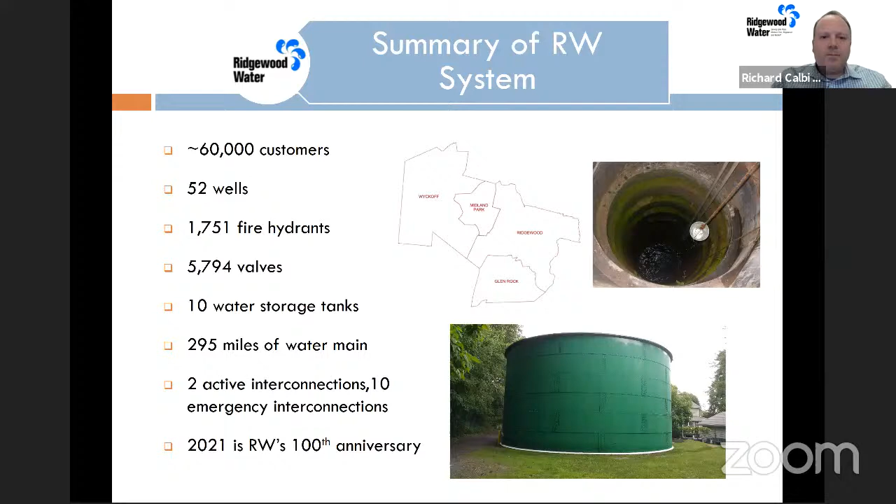Next slide please. A little background on the sources of our water. Ridgewood Water has 52 wells that account for 90% of the water treated and distributed into the system. These wells are drilled into the Brunswick Aquifer. There's a fun fact relating to Ridgewood Water wells: some are as deep as the Empire State Building is tall. We have one well over 1,000 feet, but most are in the hundreds.

The other 10% of water we provide is purchased via the interconnections. This is used primarily to meet peak summer demands and is purchased from the Borough of Hawthorne, which is groundwater, and Suez Water, which is a combination of both groundwater and surface water. This is important because Ridgewood Water's daily demand ranges from a low of 5 million gallons a day to upwards of 17 million gallons a day during summer peak months.

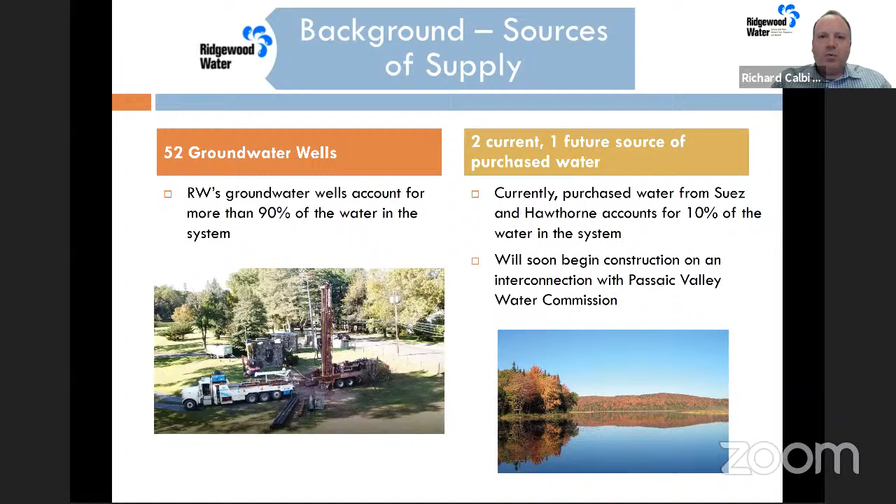Most of this peak usage is associated with residential irrigation. To help manage this peak and lessen the concentration of PFAS in Ridgewood Water, we will be purchasing from a different source in the future, as early as 2022, from Passaic Valley Water Commission, which is also a surface water source. So to start things off, I'm going to turn it over to Dan Timmeny.

Dan is our business manager for the utility. He's responsible for managing department affairs, specifically the customer service, billing, and metering divisions. Dan is going to start and talk about customer service.

Thank you, Rich, and good evening everyone. Thank you for joining. Ridgewood Water has been planning an overhaul of customer service, leading up to the rollout of 3 new user-friendly technology tools that we will be pushing out in the coming weeks. The first is a new Ridgewood Water website. The second, we are transitioning from our current payment processing vendor, MCC, to Invoice Cloud. And the third is a software-as-a-service called WaterSmart, which we think will completely revolutionize our customer service operation.

So to speak about the first item, the new Ridgewood Water website: when we set out to design the website, we wanted it to be user-friendly, organized, and aesthetically pleasing.

We wanted our customers to easily find direct links to most used items and those that are most frequently accessed. We also plan to feature interactive tools such as address lookup during annual hydrant flushing and service line material lookup for your information. We will be constantly updating a news item ticker, and the website will be mobile friendly and directly linked to our social media platforms.

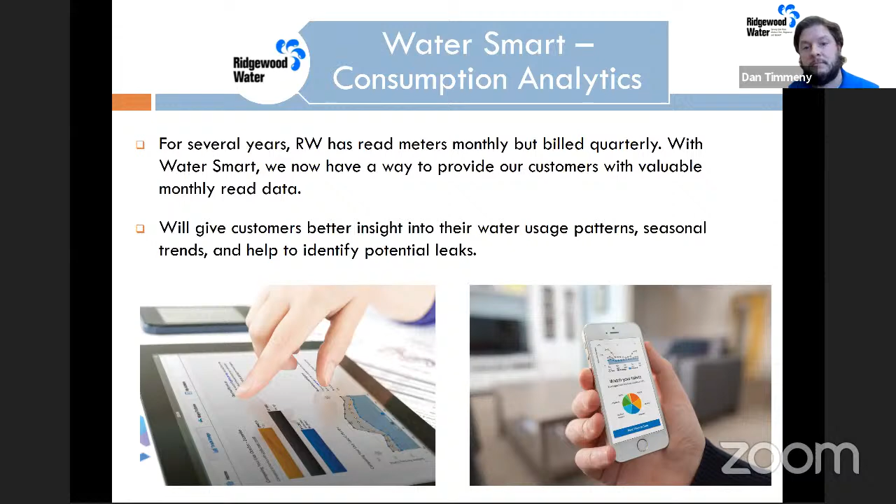So that two-way communication regarding potential leaks can really help to save money for our customers and reduce water waste. On the utility side, we'll be reaching out to some accounts proactively each month to ask customers to check for leaks on the property because of increases that we've observed in water usage.

Based on the amount of water used, a potential leak might be associated with a higher likelihood of a running toilet rather than, say, an irrigation leak. Customers can then respond to our communication about a potential leak directly based on whether or not a leak was found, and we can work together to determine the next steps.

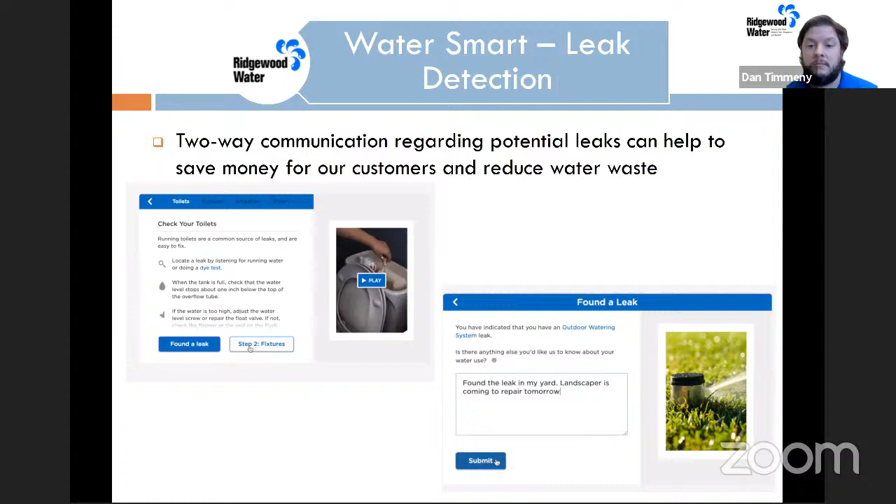In terms of registration, you will all be receiving in the coming weeks a welcome letter from WaterSmart from Ridgewood Water detailing the registration process. On the back end, everyone has an account already created—it's simply logging in and accessing that information. So all you need is your account number and zip code, followed by a simple registration using your email and password. Once that's up and running, this tool, which is free for all customers, will give you information we have internally, plus many more self-service tools. We're very excited to roll this out to you in the coming weeks.

Thank you, Dan. I think it's pretty clear that WaterSmart's going to help Ridgewood Water take the next step towards conservation and sustainability, and that's part of our overall goal in treatment and the whole operation of the system. So speaking of treatment, we have Ryan Furrey up next.

Ryan is a Ridgewood Water chemist. He's responsible for the Ridgewood Water lab and all testing and associated compliance for the New Jersey Department of Environmental Protection. So Ryan, why don't you take it away?

Hi everyone, my name is Ryan Furrey. I'll be talking about our treatment division today. Treatment division is pretty self-explanatory—we own, operate, and treat all the water that we're pumping from our underground aquifers and provide to you guys in our distribution system.

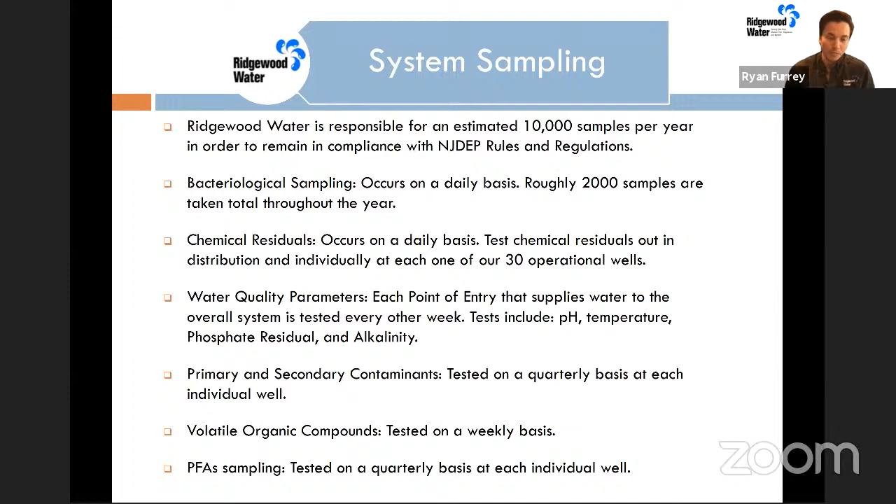Moving on to the next slide—Ridgewood Water's pilot studies. We've taken a very proactive approach with our treatment strategies through the use of pilot plant instrumentation. Basically, a pilot plant is a small-scale water treatment operation in a controlled and isolated setting.

What we do is take the newest technology, chemicals, theories, and ideas, and perform experimentation in a closed loop, making sure the effluent isn't discharged into the distribution system. We monitor, analyze, and compile all the data over a long period of time, and look at how these new technologies and chemicals are working to see if we can implement them into our own system.

It's honestly beneficial twofold—not only for us, because it optimizes our system and ensures we're doing the right thing, but it also can help with cost. So if there's a new technology or chemical out there that does the same thing but at a better cost efficiency, obviously we're going to use it, because it'll help not only us but you guys as well—it'll be easier for you to pay for the water.

We've just recently finished up a lead and copper optimization study for our pilot studies. We also did a mixing study with Passaic Valley Water, which is actually part of our new interconnection, and it's going to allow us to increase our demand and maintain water into our system. We're also in collaboration with the EPA on one of our PFAS studies, so it's an exciting thing, and we're going to continue doing this kind of work for the foreseeable future.

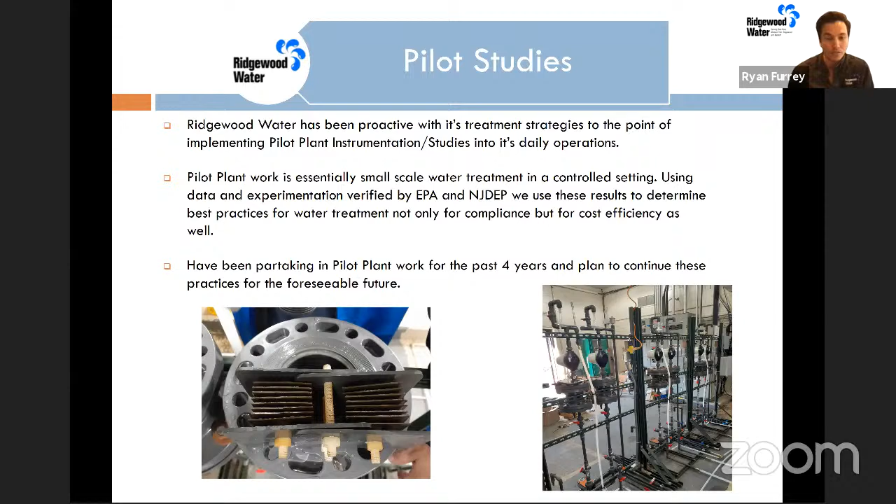So how does lead actually enter the drinking water supply? This is a great question, everybody should know and be informed about this.

This is not naturally occurring. Basically what happens is as water interacts with pipes, lead solder, and lead service lines, the friction when it's moving over a pipe is going to take that lead through what they call leaching, and it absorbs into the water supply. That's how lead contamination occurs. In layman's terms, it's like when you rub your hands together and get friction, you get particulates coming out in your hands. So that constant rubbing over lead solder and lead service lines is what causes the lead to leach into the water supply, and that's what people could potentially be ingesting.

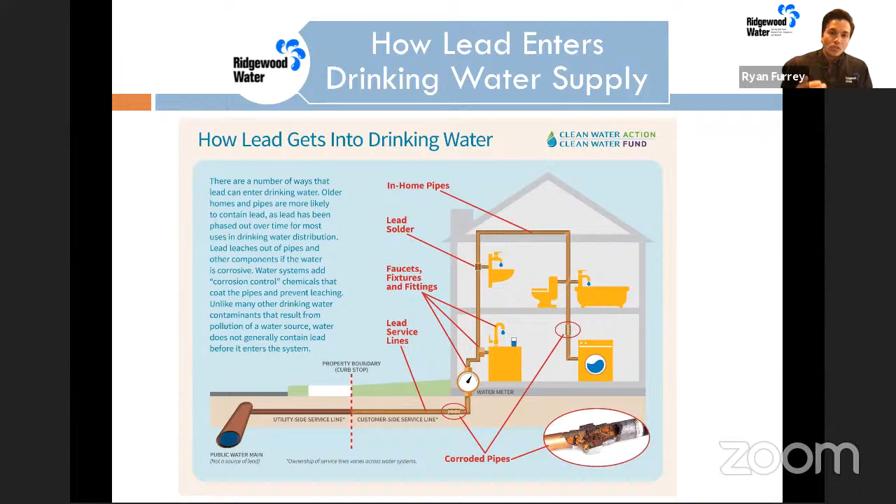If we move on to the next slide. Basically how we take care of this is with an addition of polyorthophosphate. It's a food grade additive, to be honest with you. It's something that is used constantly and people ingest all the time.

Basically what happens is it creates a small biofilm. If you picture a pipe and water, as water's running over a pipe, it's interacting with that pipe and constantly rubbing, getting more and more lead into it. But when we add this new chemical into the pipe walls, it coats the pipe walls and creates a small barrier. So now picture a pipe with a small barrier and water flowing over that barrier - you have a nice little gap. So now you don't have that interaction between pipe and water, and that's how it's protecting you from lead and copper contamination. That's basically what's happening.

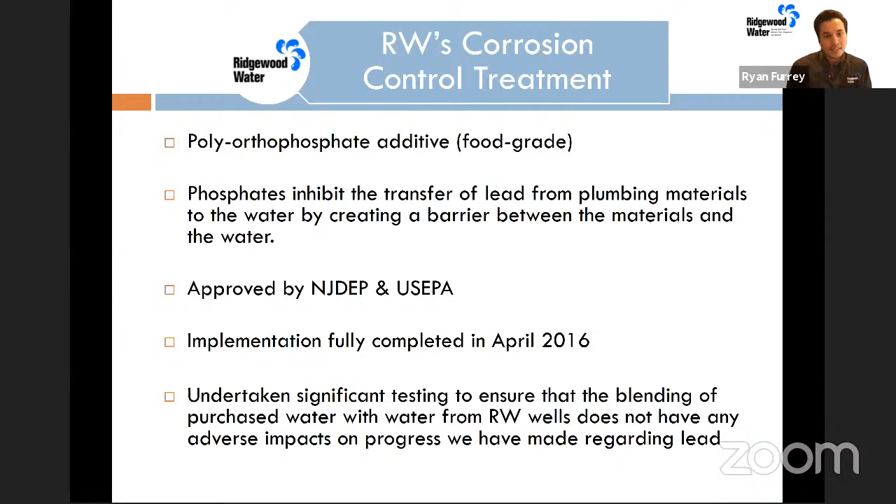So we implemented this new corrosion control treatment in April of 2016. Looking at our next slide, you can see the results of this implementation.

Anybody can access this small table right here - it's an NJDEP approved website. If you type in NJ Drinking Water Watch and click on the first tab, you can find all this information online, but this is just a snapshot so you can see in real time what I'm talking about. From 2016 on to 2021, you can obviously see that lead and copper has significantly reduced over time since we added this new corrosion control inhibition.

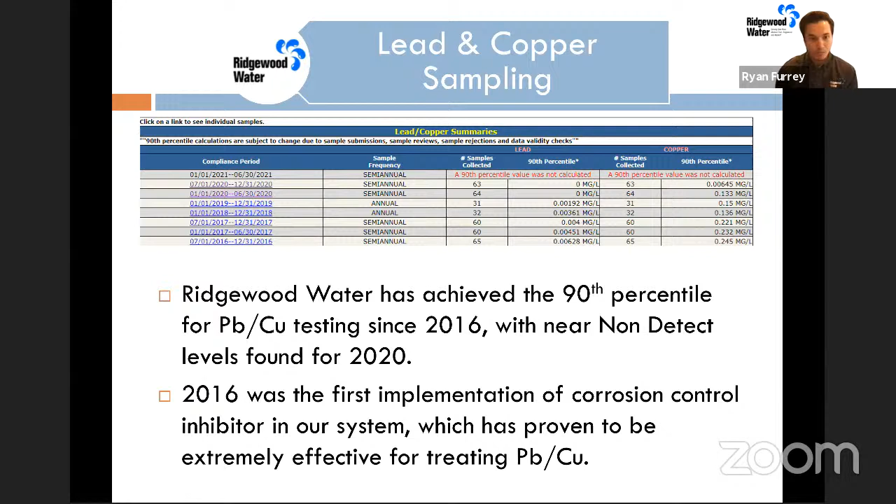The way that we collect samples for this is not biased - we're not taking it from random spots that we can control. We have to coordinate with the DEP and take samples from sites that they have determined, out in the distribution system. People volunteer for us and take water from their own tap, so it's real-time data essentially - what's actually coming out of consumers' taps. It could be your neighbor, it could be someone out in the distribution system. That's how we're getting all this data for the DEP, and as you can see, it's been working very well.

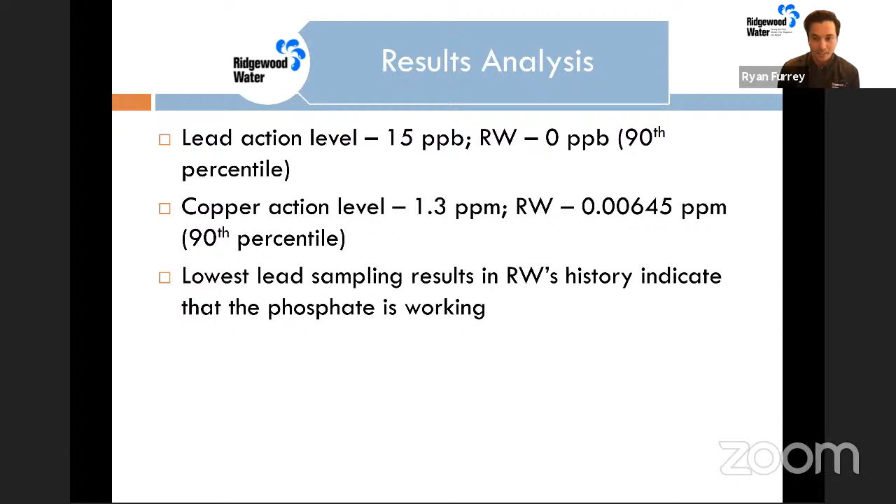Again, for the results: the lead action level is 15 parts per billion. Last year we had 0 ppb, so that's fantastic. The copper action level is 1.3 parts per million, and we've gotten it down to 0.00645 parts per million. These have actually been our lowest recorded sample results in the history of Ridgewood. So obviously the way we're treating for lead and copper has been very effective, and we're going to continue doing that unless we find a different technology from our pilot studies, and we'll try to implement that. That's all I got.

Thank you, Ryan. I'm glad you took time to highlight lead and copper, because no matter what the newest type of contaminant may be, we always get questions about lead contamination in the water. So it's important that we shared that today.

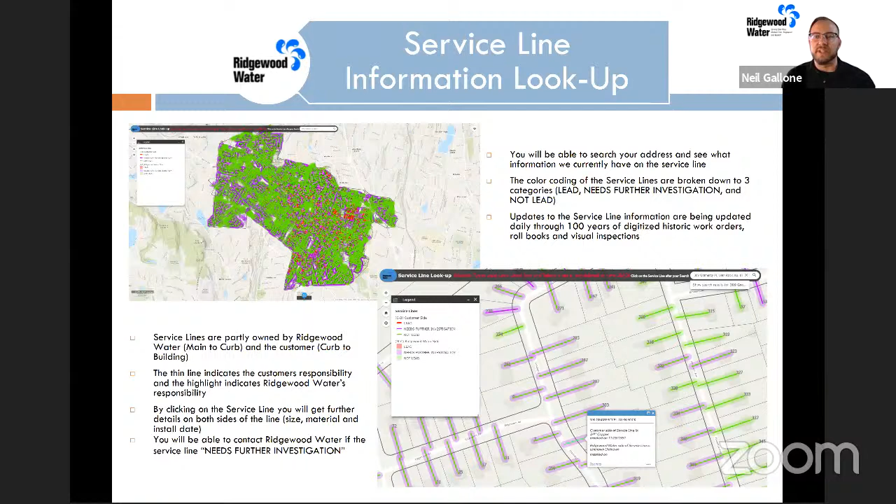Once you know what your line is made of, or if you see that it needs further investigation, an additional resource we are going to provide, and currently do provide, is a discounted water test kit. You'll be able to contact customer service and set up a day for an employee to drop this kit off at your home, which will also include instructions.

We do our hydrant flushing in the fall due to supply constraints in the spring and summer, and temperatures being too low in the winter. When we're doing our flushing, we use about 1.5 million gallons, which is why we can't do this during the summer. We also attempt to perform these flushings at night to limit the impact on water service and quality.

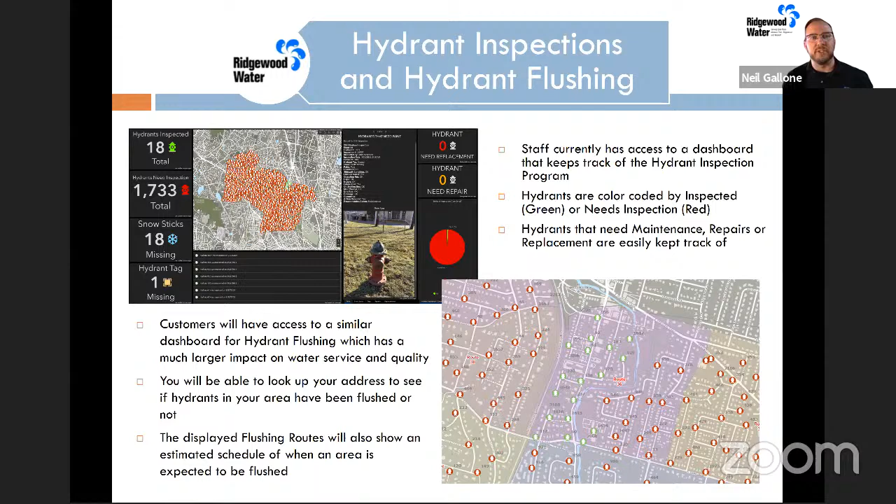With this flushing dashboard, you'll also be able to see when hydrants are being flushed live. When the men are out in the field flushing a hydrant and they finish, they complete it in the field, which is connected to this dashboard, and you'll see the hydrant go from red to green. You'll also have an estimated schedule when you zoom into your property and search for your home, displaying when we believe we will be in your territory to perform this flushing, to help alleviate any issues you might have with dirty water.

The last one we're hoping to have out very soon should be kind of familiar to everybody—if you're ever wondering, does PSE&G or Orange and Rockland know I don't have any electric now that the wind has been blowing a little too fast?

This one will, for water outages, show both emergency and planned outages. It will display the exact location of an event and highlight the customers that were affected. Some examples shown on a map like this would be water main breaks, main replacements, valve installs, and boil water notices.

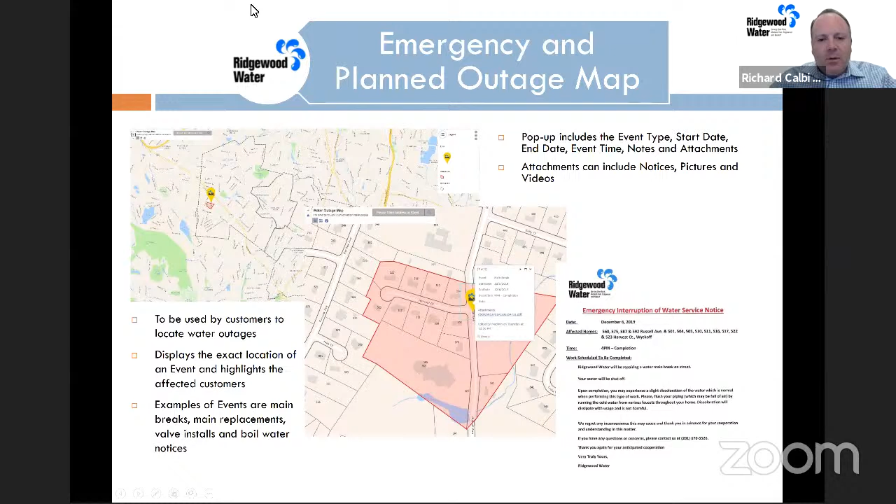Thank you, Neil. It's important to mention, mapping has been something utilities have used for, I don't know, 10, 15 years or more, and it's helped our planning and operations greatly. It's so great to see now that we're going to be able to share that with the public and give users the ability to see everything we're doing live. It'll help the consumer better plan themselves for improvements and things they're doing around their home.

Yeah, I've been doing this 21 years here now. So this is a nice change to be able to show some of the work, not just to all my fellow employees, but hopefully to all the customers out here as well.

It's very exciting stuff. All right, so next we're going to turn it over to Bill Bierwas. Bill is the Assistant Superintendent for Ridgewood Water. He heads up compliance, filling in for our licensed operator. He runs the distribution division and also the treatment division at times. So Bill's going to give us an overview of some of the work we're doing on the distribution side of things. All right, thanks, Rich.

Thank you for the intro, and thanks everyone for joining tonight. It's such a beautiful night. I'll try and make it as brief as possible. What I wanted to start with tonight was talking a little bit about the distribution division.

The distribution division of Ridgewood Water is not commonly highlighted at our open houses and community forums, although their work is just as vital to the safe, clean drinking water provided to your home. These crews are the ones in the trenches, digging and making repairs to our distribution network despite heat, rain, and even snow. So what do these crews do on a daily basis?

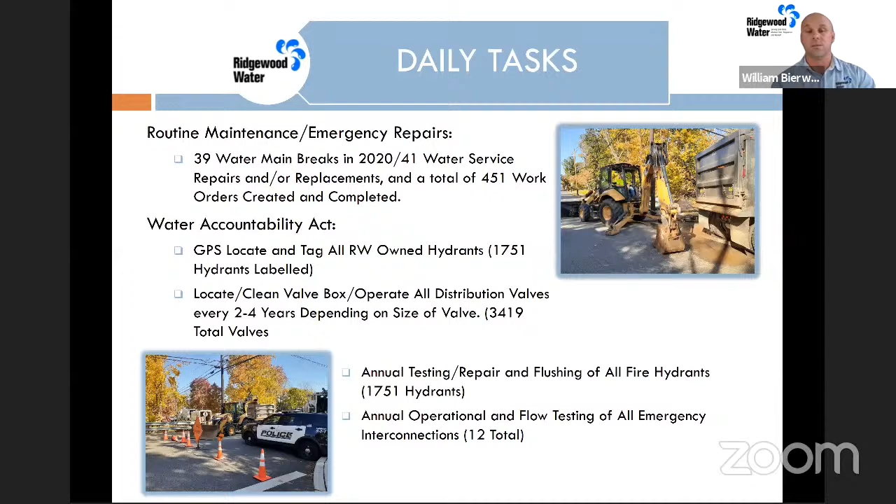In 2020, Ridgewood Water initiated in-house efforts to replace and construct new water mains within the system. 3 quotes were solicited for the replacement, and prices ranged from $147,500 to almost $300,000. Distribution staff completed the entire project for $89,500, including base pave, for a savings of $58,000.

Due to the success of the project, crews continued to replace over 2,000 linear feet of water main in 2021. Ridgewood Water also contracted OnCue to replace an additional 4,100 feet of pipe. The distribution goal for 2021 is an additional 2,000 feet of water main, for a grand total of just under 2 miles of pipe replaced in just less than 2 years.

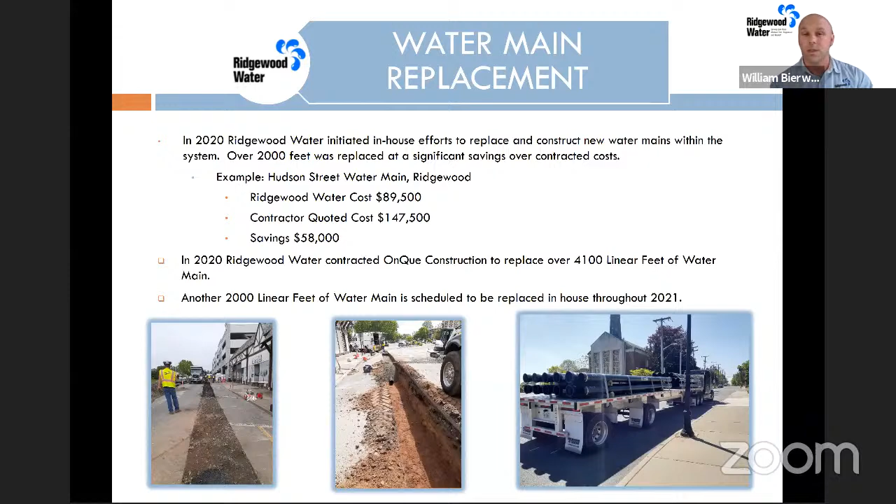So on the bottom here, you're going to see a valve replacement that we performed. This was towards the end of 2020. Ridgewood Water staff identified 2 damaged valves during the routine valve inspection program that Neil mentioned earlier. These valves crossed Route 208, and replacement required coordination with the NJDOT, Wyckoff Police Department, Ridgewood Water Treatment Division, and various local traffic details. Each 16-inch valve, shown on the bottom left there, next to one of our guys, weighed over 1,250 pounds without fittings, and to date is the largest in-house valve replacement performed by Ridgewood Water.

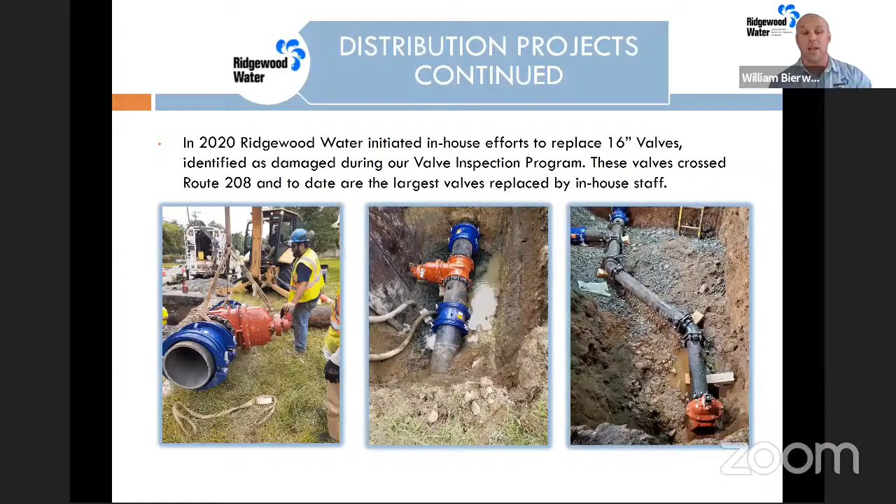Next, I want to get into the PFAS master plan. So what is PFAS? If you take a look at our notice, you probably know a little bit about it, but I want to go a little more in depth. PFAS is per and polyfluoroalkyl substances, of which there are hundreds of compounds, including PFOA, PFOS, and PFNA. These compounds are found in firefighting foam, nonstick coatings, water repellent coatings, and even food packaging.

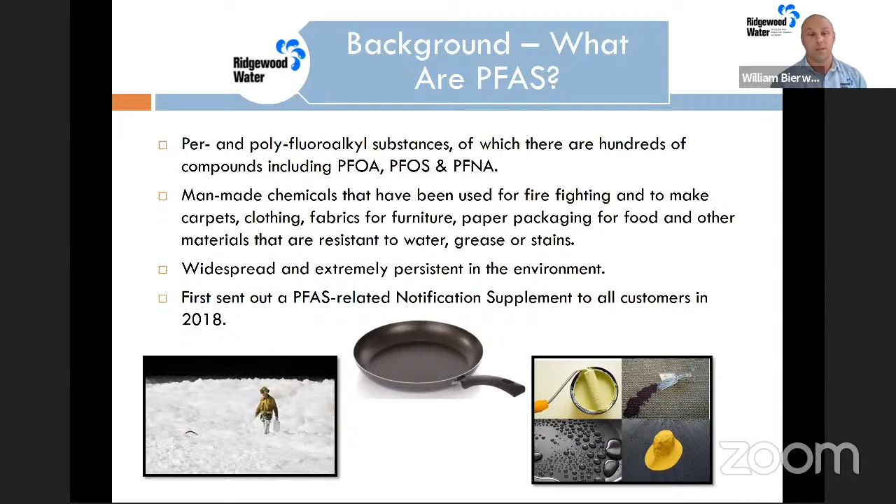They're very widespread in the environment. PFAS compounds have even been found in the blood of polar bears, hundreds of miles away from humans. Interesting but alarming fact, on this very day in 1938, DuPont invented Teflon at their factory in New Jersey.

So I want to talk a little bit about our PFAS master plan. We hired Mott MacDonald, the professional engineering and design firm, to perform a whole system PFAS master plan. They evaluated all PFAS treatment strategies and quickly narrowed down the choices to granular activated carbon and synthetic resin. GAC is on the left side of your screen, synthetic resin is on the right. There are some advantages and disadvantages to both. GAC has many full-scale drinking water installations, can remove other contaminants such as organics, and can be reactivated or incinerated.

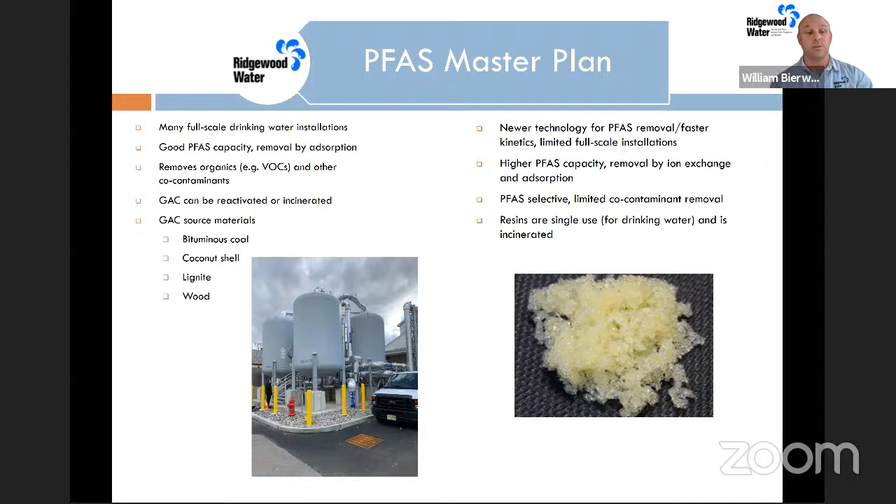Resin is a newer technology with fewer full-scale installations. It is very PFAS selective, meaning that there's very limited co-contaminant removal. It likes to just remove PFAS. Resins are also single use with no option for regeneration.

So what are we doing to remove PFAS? Through collaborative research with Ridgewood Water personnel, Mott MacDonald developed a plan to centralize treatment. This method will reduce the number of treatment facilities from a current 31 down to a total of 12 points of entry. To facilitate this method, over 61,000 feet of raw water main must be installed, as well as 12 new treatment buildings. Important factors considered in this design were space availability and impact to the community. As some residents know, some of our wells are located in backyards, postage size, very small lots. In order to do this treatment, we needed to move them to larger lots, hence the raw water mains.

Also, workforce requirements: the reduced geographic area will reduce the number of water operators necessary to run the treatment system. And also seasonal operations, like Rich talked about. We need to be able to drop flow down to 4 million gallons in the winter, but increase that during peak demand when irrigation really kicks in around this time of year, up to 17 million gallons. By having that centralized, it'll really assist with that.

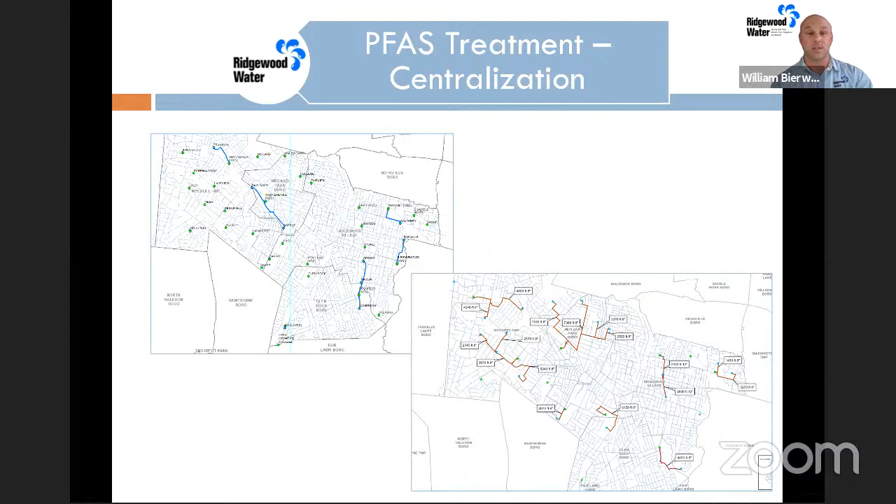Presently, there is one GAC treatment facility in operation, providing PFAS-free water to the system. 5 additional plants are currently under design, and an additional 7 treatment plant designs will begin later this year. 3 more plants are to be completed for operation by 2023, and all plants providing 100% PFAS-free water will be operational by 2026.

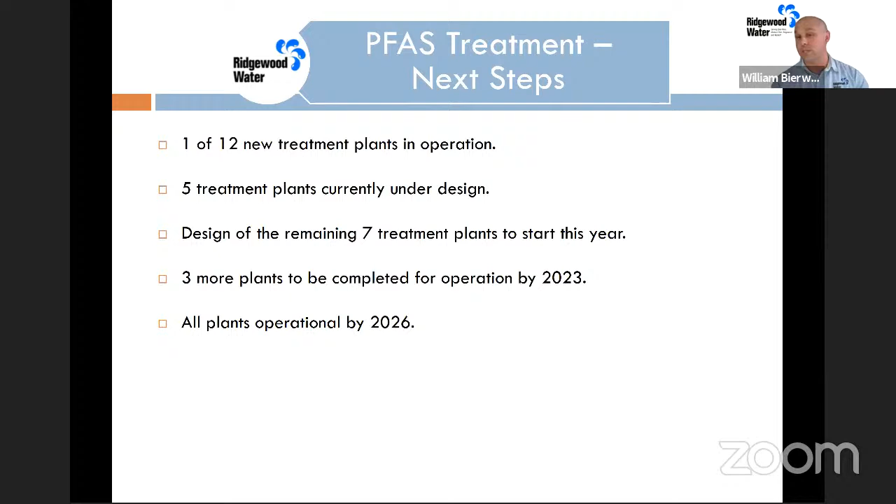All right, I'll pass this over to Dan Timmeny, our business manager. He's going to talk a little bit about how we're going to fund this huge endeavor.

Thank you, Bill. So let's talk about costs. How do we fund the capital improvements and operating expenses associated with PFAS treatment? As a reminder, Ridgewood Water has filed a complaint against some of the manufacturers of PFAS chemicals, but it will take years for the litigation to work its way through the court system, and there are no guarantees as to the result of that litigation.

While we certainly will be looking to see if funds are made available in the future at the state or federal level, there are none today. We wish that we had other options available to us, but right now we have to absorb these costs of operation, which will be reflected in rates.

So we thought, rather than raising the volume rates by some amount, we would hire an independent rate consultant to assist with the development and financial calculation of a PFAS-specific surcharge to fund remediation and necessary system changes. We will continue to utilize the services of that independent rate consultant each year to recalculate the upcoming year's required PFAS surcharges. That surcharge would be offset in the future by any grant funds or legal recovery that is made by Ridgewood Water for that treatment.

So essentially, we have separated out PFAS-related costs, both capital and operating, in our budget process to be as transparent as possible regarding the projected costs of that treatment and our required investment.

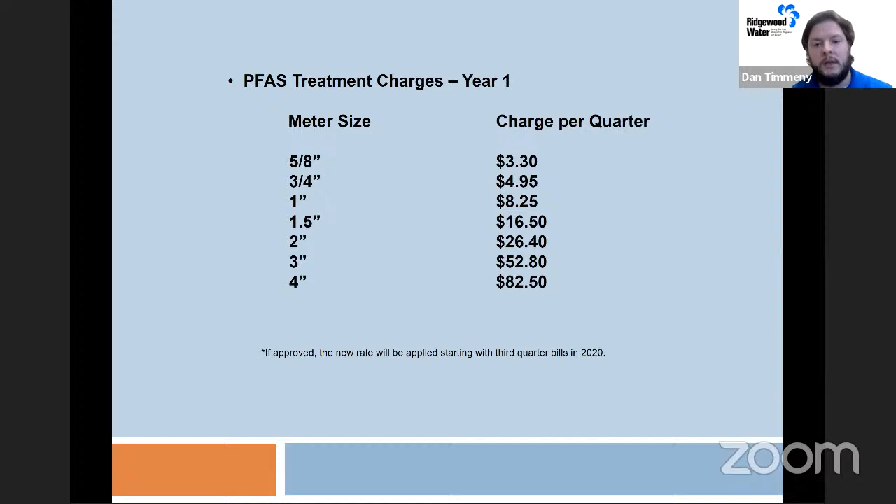So for more than 90% of our system, meaning those who have a 5/8 inch meter, that means a quarterly charge of $3.30. That scales up based on that flow. So for a 3/4 inch meter, $4.95 per quarter, up to a 1 inch meter, which tends to be the highest of the residential meter types for those large houses with many irrigation zones, at $8.25 per quarter. The 2 through 1.5, really through 4 inch meters, tend to be the commercial operations, and you see the flow rate reflected in those charges as well.

So we'll use the 5/8 inch meter as an example since it's more than 18,000 customer accounts. Again, $3.30 in 2021 is the projection, $12.44 per quarter in 2022. This 2021-2022 period is really where the design of our capital related projects is occurring. In 2023 and 2024, when those projects are actually being built, is our biggest capital outlay. And that's why you see this big jump in 2023 and 2024 in related quarterly charges.

So for 2023, a really rough estimate at this point would be $38.43, up to $54.54 in 2024. After that, the projections begin to drop back down again as fewer remaining projects are being built.

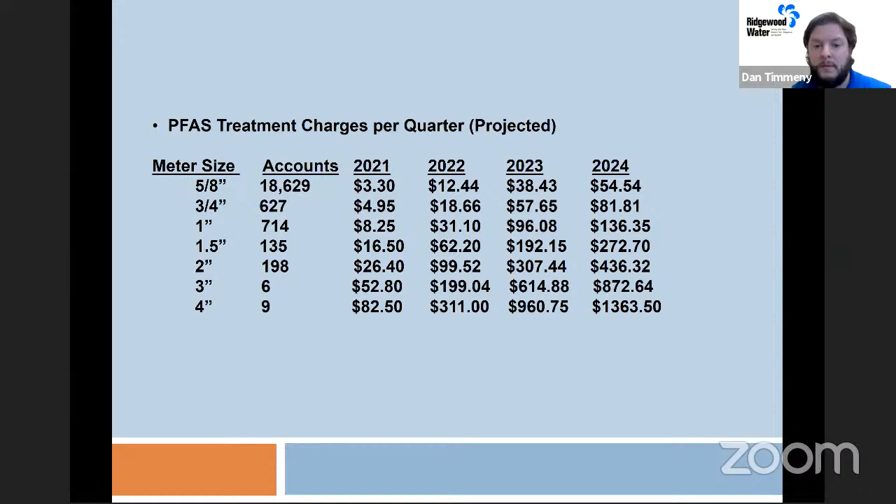All right, thank you, Dan and Bill. Sorry about that.

So I think what we touched on in distribution was very important. I don't think many people realize that Ridgewood Water system is over 100 years old. We are celebrating 100 years this year in 2021, being in service to the Borough of Glen Rock, Borough of Midland Park, Township of Wyckoff, and Village of Ridgewood. And it's clear from the presentations that you all gave that we're helping to shape Ridgewood Water and sustain its operations for another 100 years.

I think the best laid plans are set. It's clear we have a lot in front of us, particularly with the PFAS treatment, but I don't doubt that we're going to achieve success and maintain the schedule that we put forward to get it all complete.

So with that, I'm going to move to the question and answer portion of the presentation. I'm going to start with a question that's in the queue here. I'm going to put this to, I think, Neil first, and then probably to Ryan and Bill or Dan. But Patricia asks, should we be testing the water at our tap?

So maybe, Neil, why don't you repeat again about the lead testing that's available for homeowners, and then I'll ask Ryan or Bill about what else could be done about certified labs and testing your water at the house.